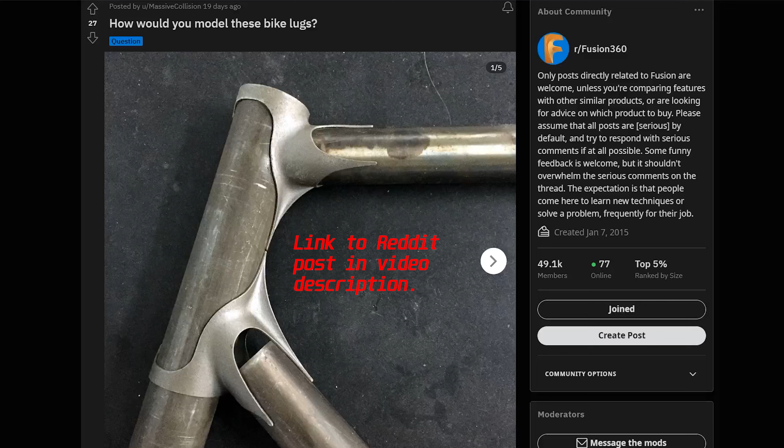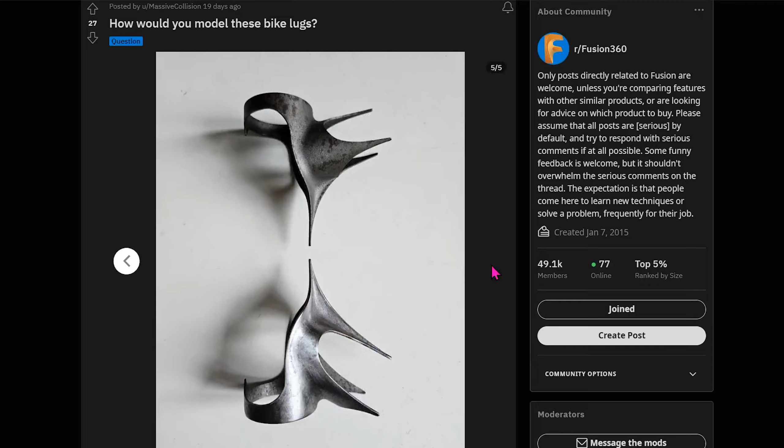We have a few pipes here, and the aim is to model out these lugs that allow you to join the pipes together. Before I begin, I want to be clear in stating that I am not familiar with how these lugs can actually be manufactured, so the workflow here might not be suitable for all situations. It would be better to think of this as more of a conceptual exercise in modeling out a certain shape. Depending on how you want to make the parts, you can adapt this workflow accordingly.

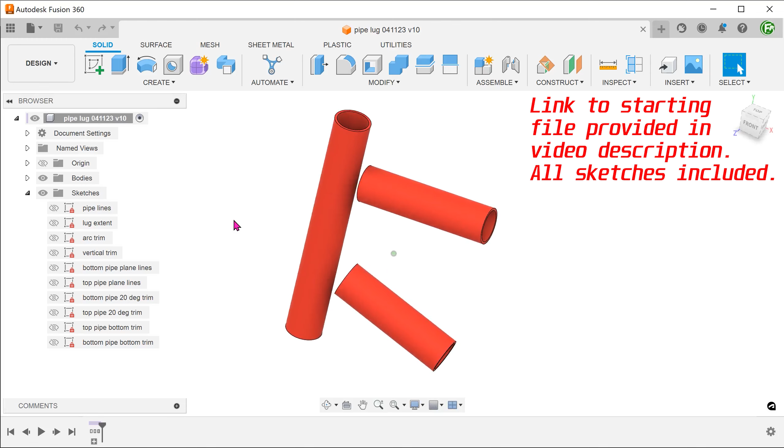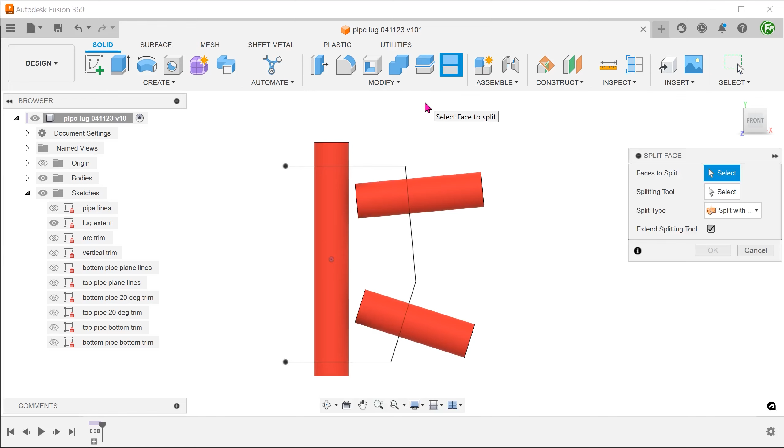We are going to start with these 3 pipes. These will provide a framework from which to build the lugs. First, we want to define the extent of the lugs. To do that, I have prepared a sketch here. Go to Modify, Split Face. Select the faces of the pipes. For Splitting tool, click on the Select box and select the sketch.

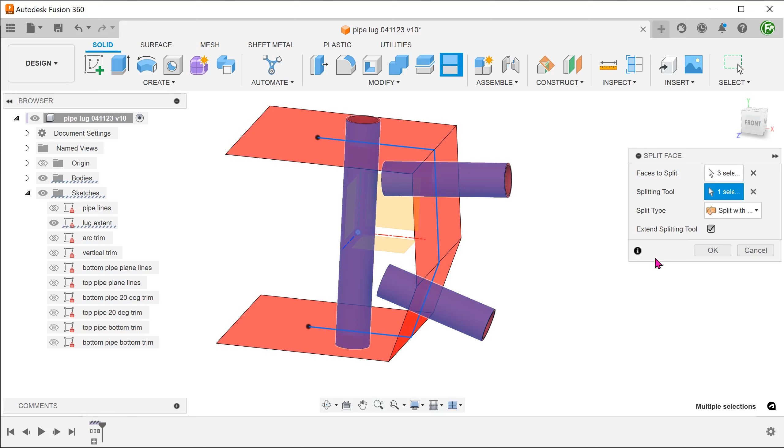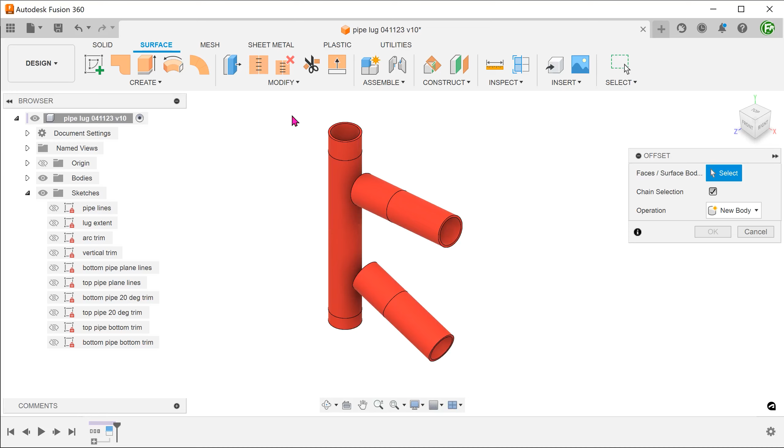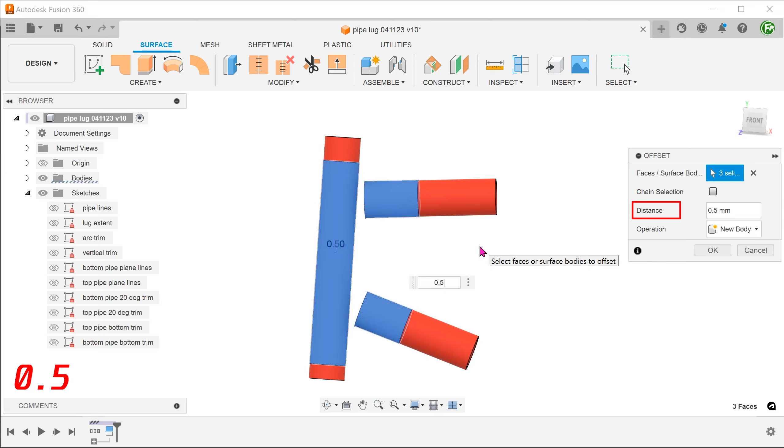From here, we want to create an offset of these faces. The offset faces will serve as the inside faces of the lugs. Activate the Surface tab. Go to Create, Offset. Remove the Chain Selection option so that we can select faces individually. Select these split faces. I want a clearance of 0.5 mm between the lugs and the pipes, so set that as the offset distance.

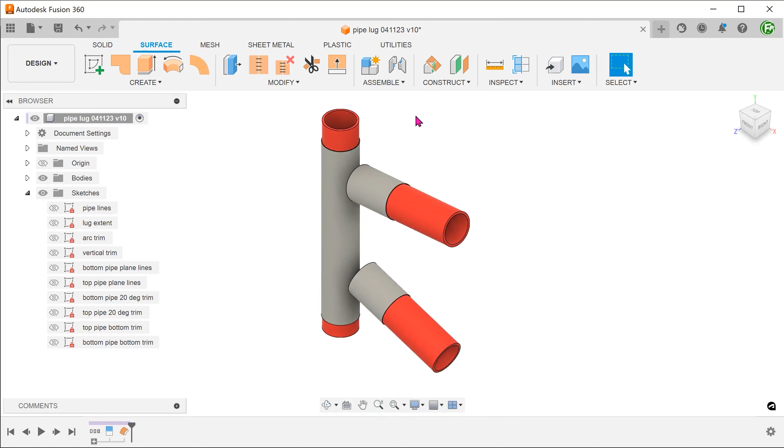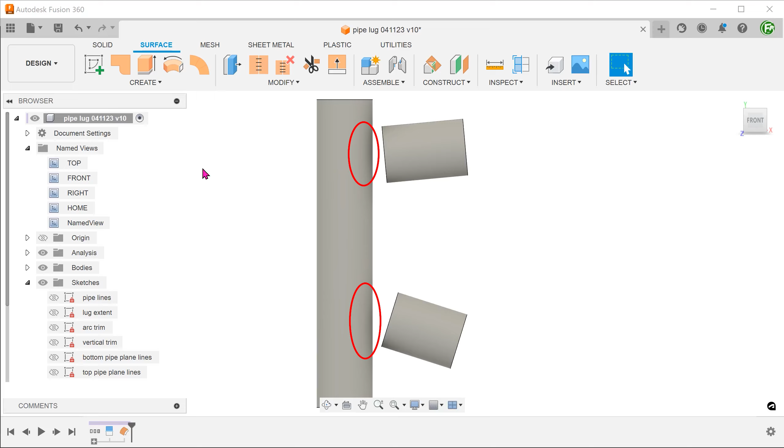Let's hide the pipes for now. We need to create a transition between these 2 pipes and the vertical pipe. This is going to require a loft. We need to create openings on the vertical, from which we can join the 2 with a loft. I have created a sketch which consists of 2 arcs joined together. These arcs have been joined together so that we can perform the trim in a single operation.

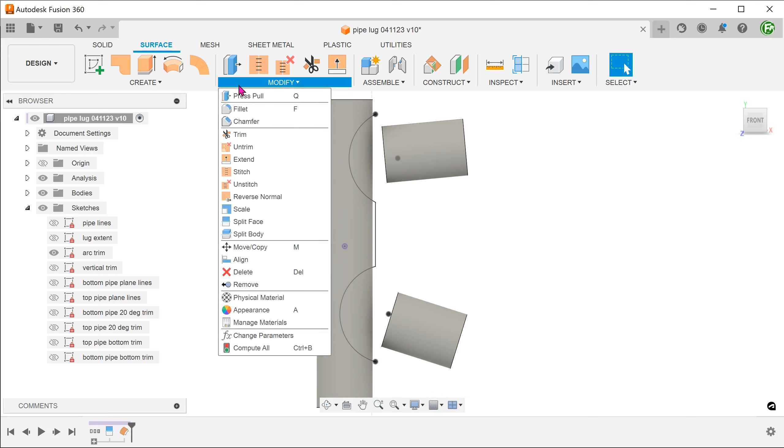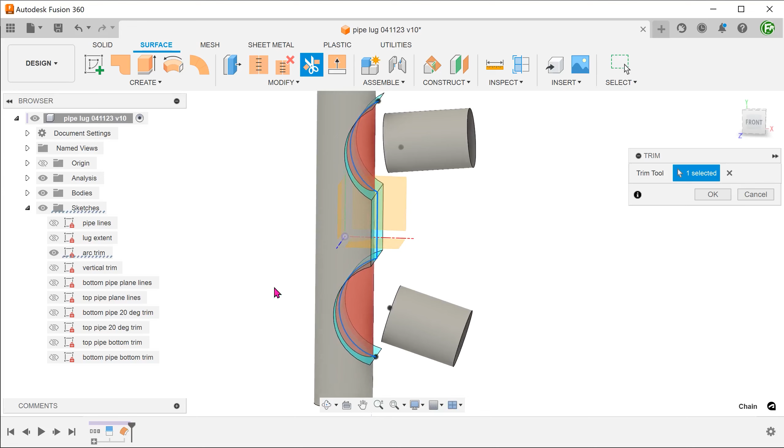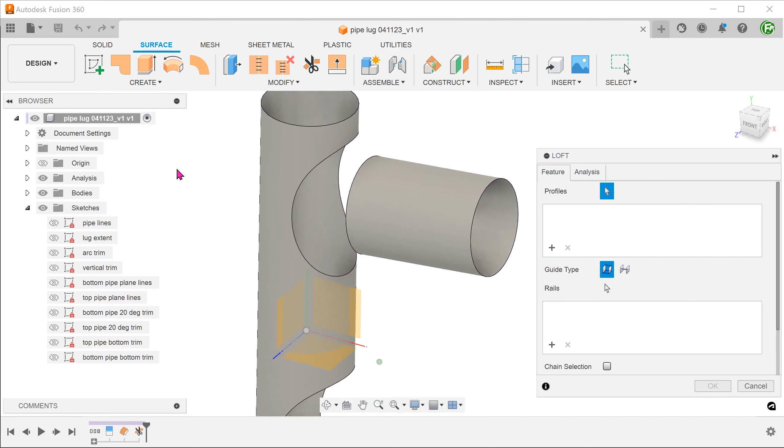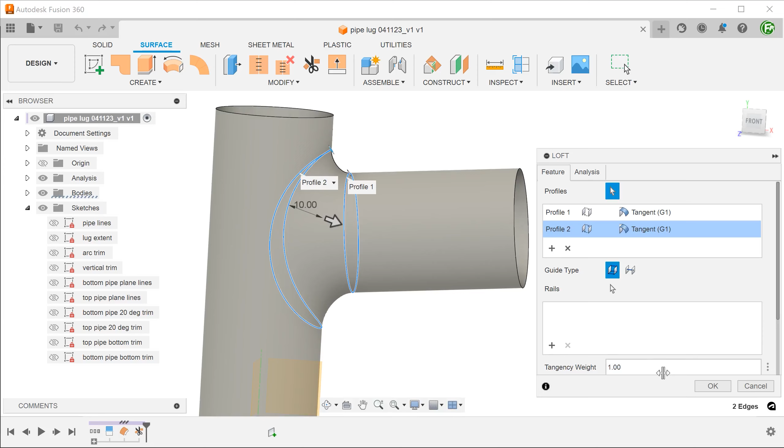Go to Modify, Trim. Select the sketch as the Trim tool. Select these faces to remove. Go to Create, Loft. Loft from this edge to this edge. Set both continuity options to tangent. Repeat these steps for the bottom pipe.

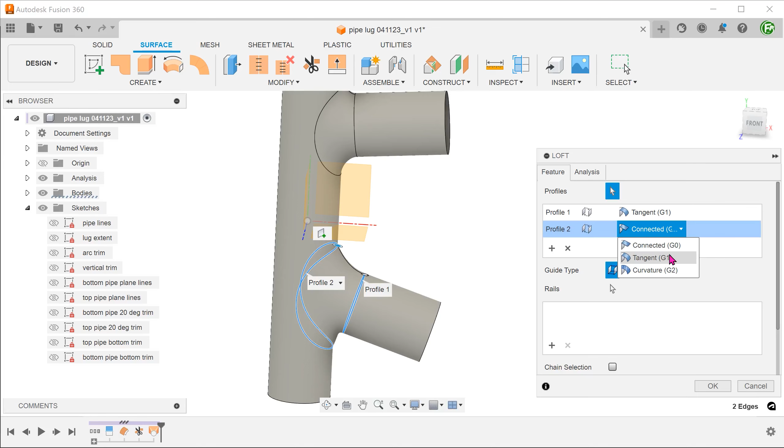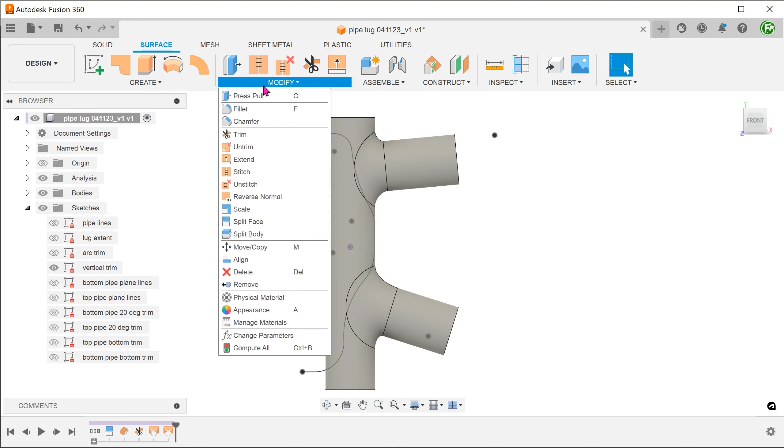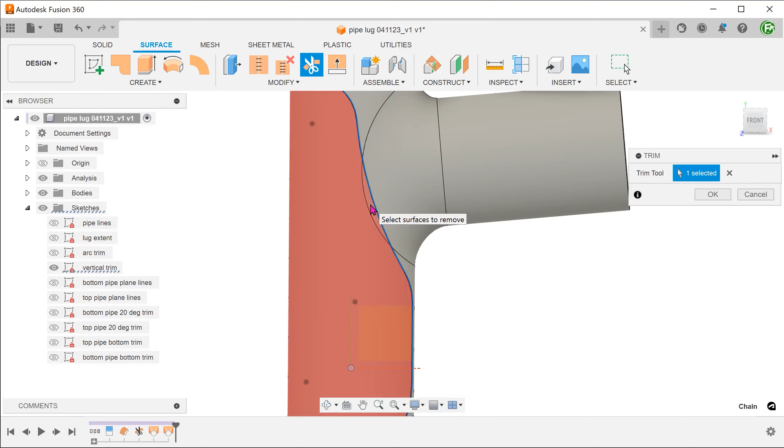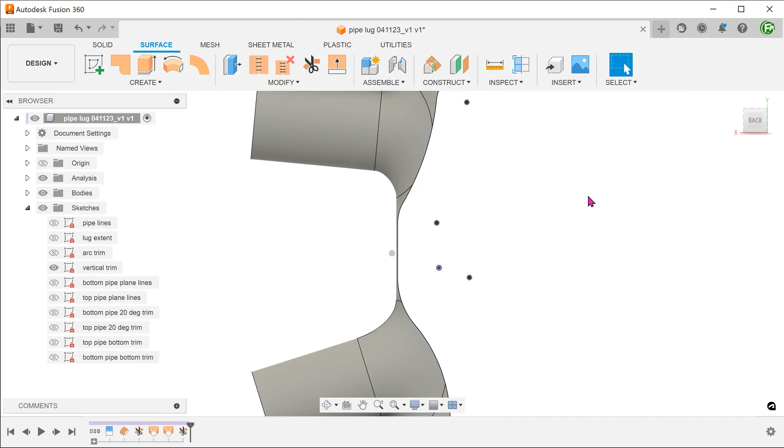I prepared a sketch here to trim the vertical pipe. Go to Modify, Trim. Select the sketch as the Trim tool. Select the faces to remove. Make sure that you select this small sliver as well. Do the same for the other side. You can create a sketch on the right plane to further trim this segment. I will leave that to you.

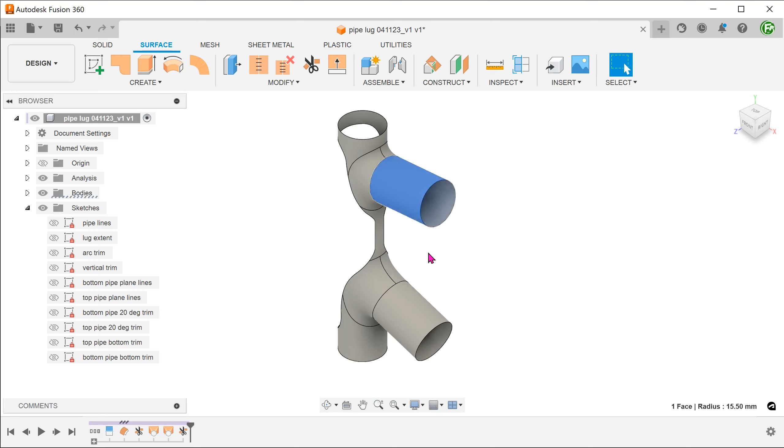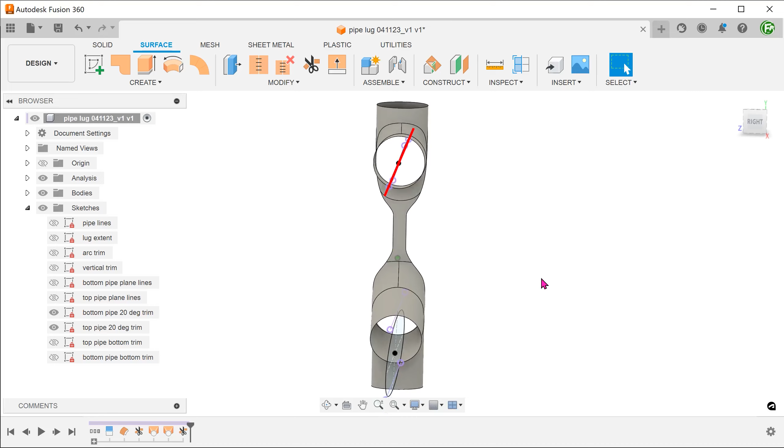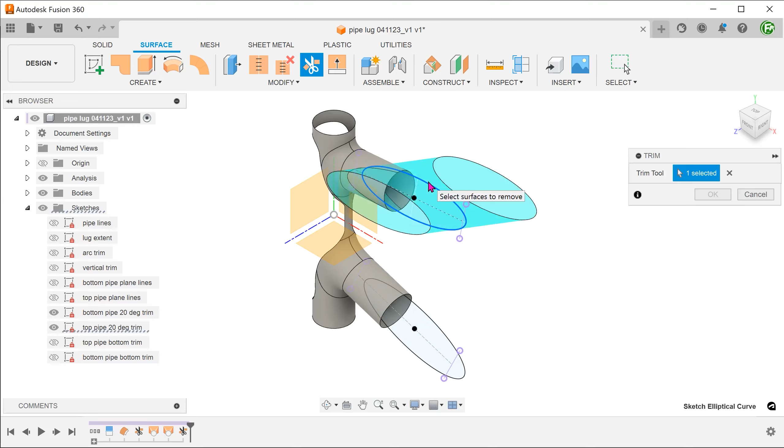For the next few steps, we are going to perform a series of trims on these two faces. Let's review these two sketches. These are ellipses rotated 20 degrees about the axis of the cylinders. Use these sketches to trim off the cylinders. Take note to trim only on one side.

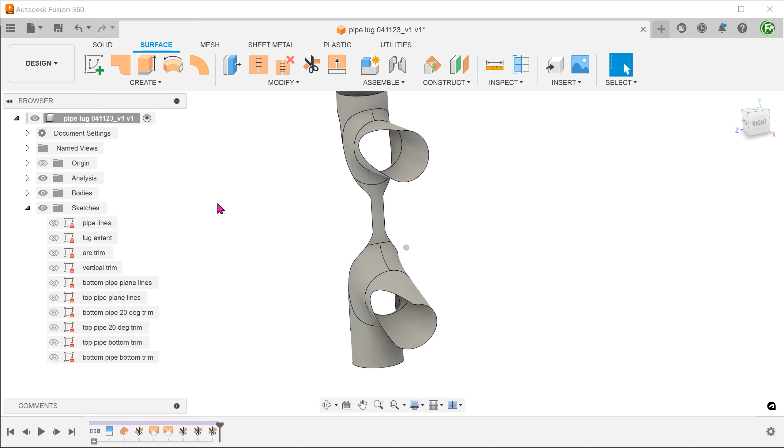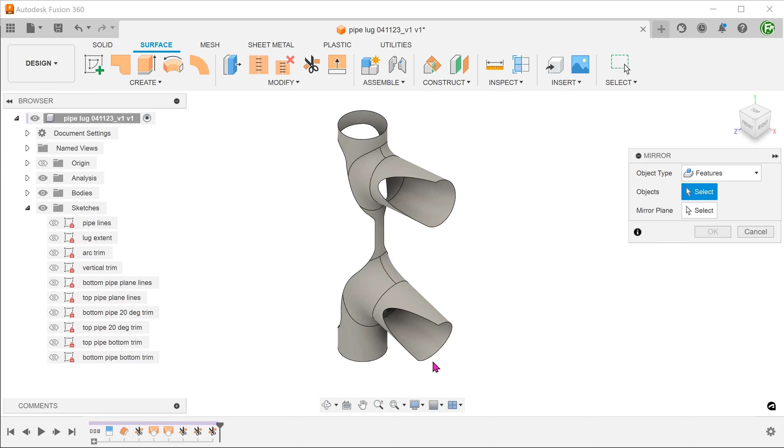Go to Create, Mirror. Set Object Type as Features, and select the previous two trims from the timeline. Set the front plane as the mirror plane. Set Compute Type to Adjust.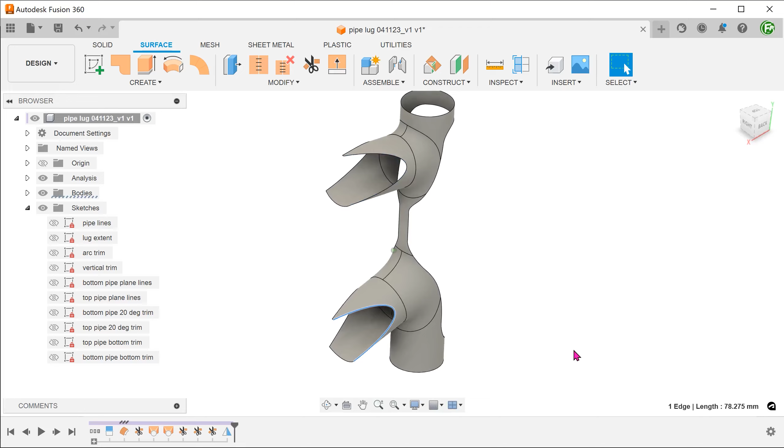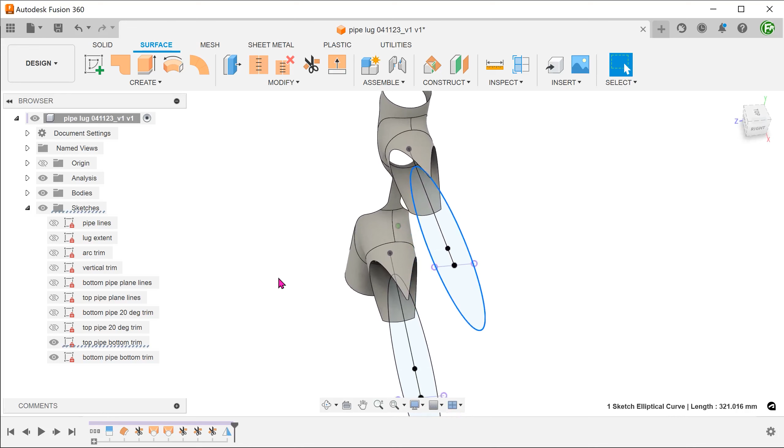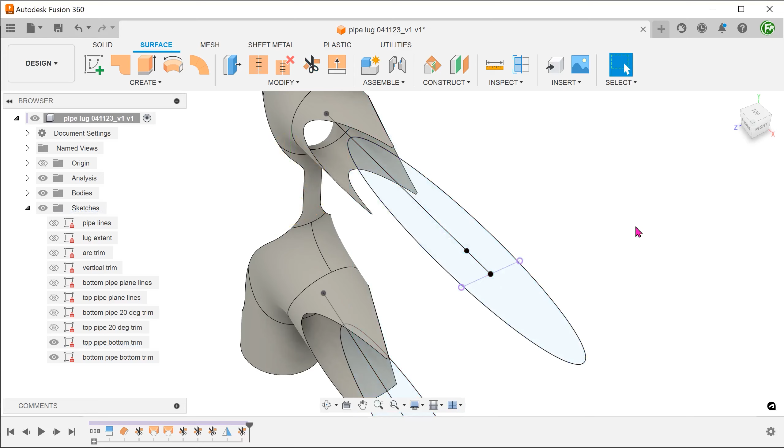Let's review these two sketches. We are going to use these sketches to trim off more material from the cylinders so that we can achieve the pointed tips. We have completed the overall shape.

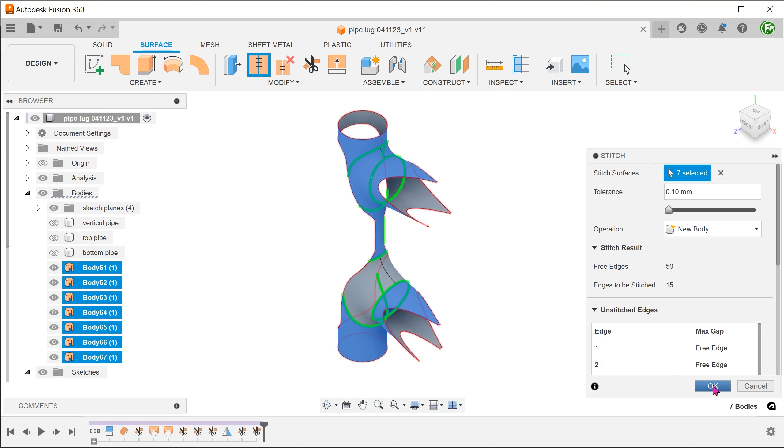These are still separate surface bodies. Go to Modify, Stitch. Box select all these surface bodies and stitch them into a single surface body. This is now a single surface body with zero thickness. Let's bring back the pipes.

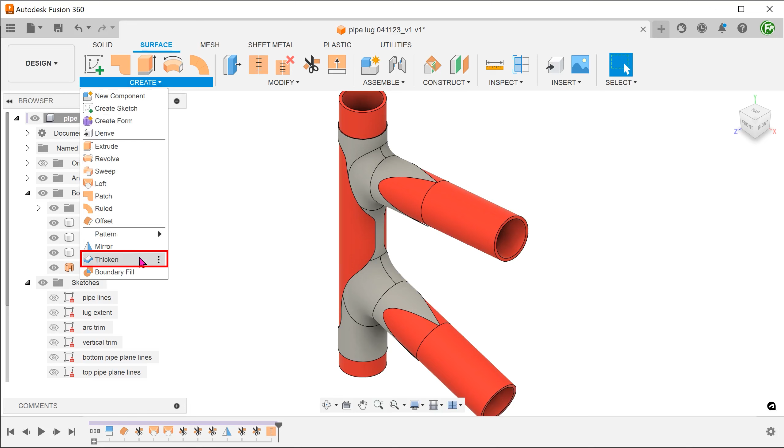Go to Create, Thicken. Select the surface body from the Bodies folder. In this case, we want to thicken away from the pipes, so set direction to one side. Set the thickness. If the direction is incorrect, you will need to put a negative in front of the thickness value.

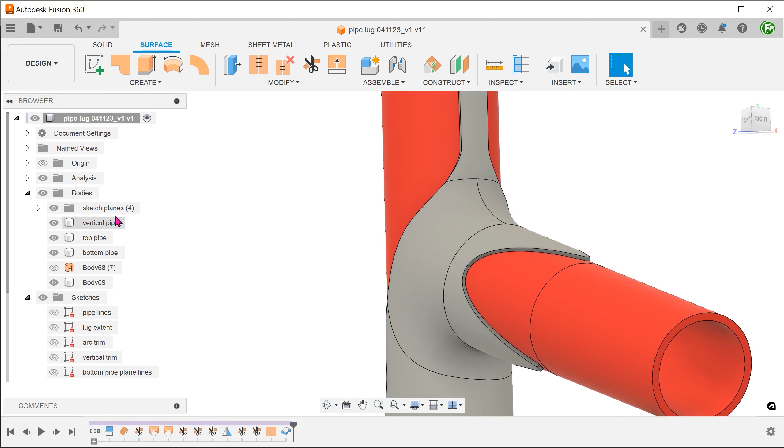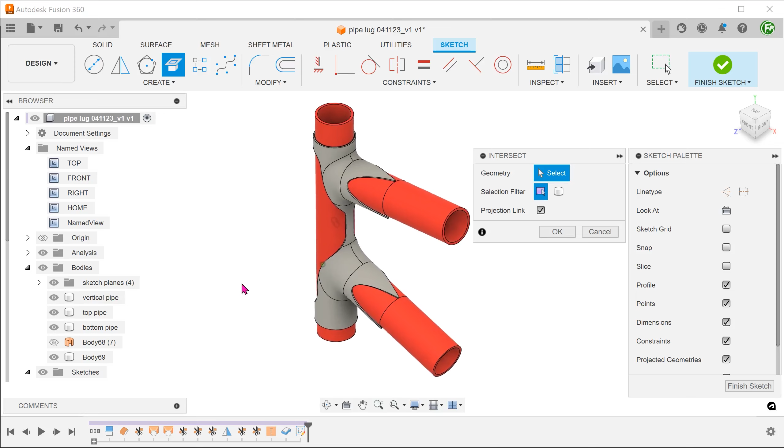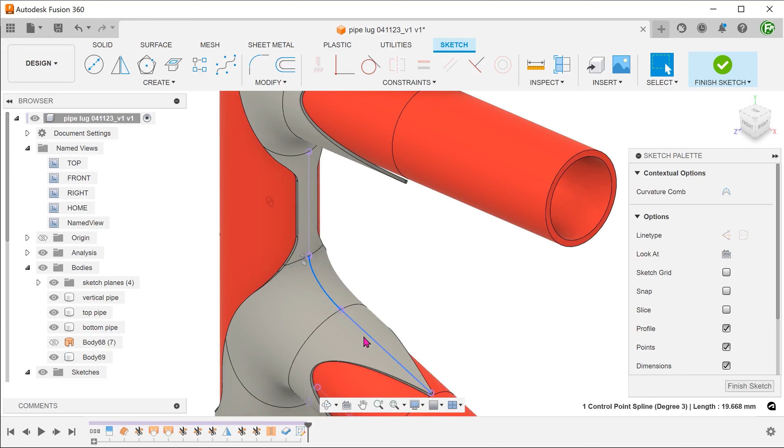Next, I'm going to add this rib as reinforcement. Begin a sketch on the front plane. Go to Create, Project Include, Intersect. Select these faces. These projected lines represent the intersection between the sketch plane and these faces. Click on Look At to return to a view normal to the sketch plane. Let's hide all the bodies.

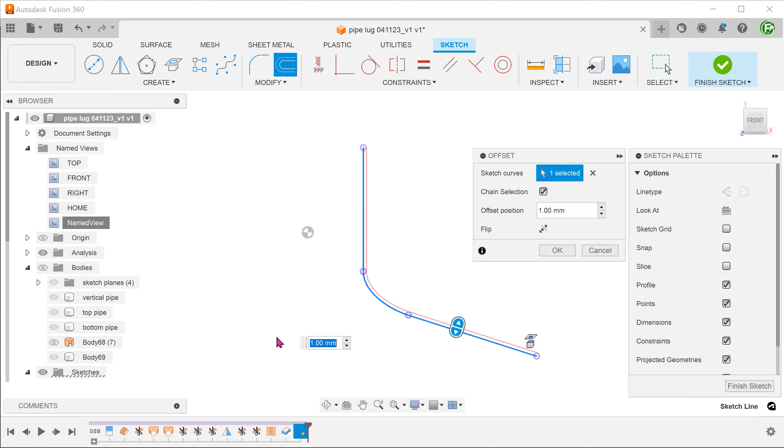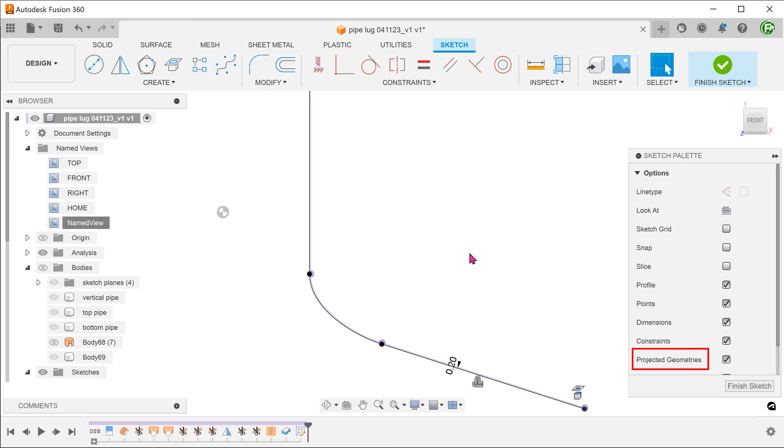The plan is to draw the profile for the rib and then use the rib tool. During testing, I find that if I draw the profile directly on these projected lines, the rib does not generate properly. So I am going to create an offset of these lines. Select these projected lines and set the offset distance. Make sure to offset into the material. We can hide the projected lines by checking off the Projected Geometries option in the Sketch palette.

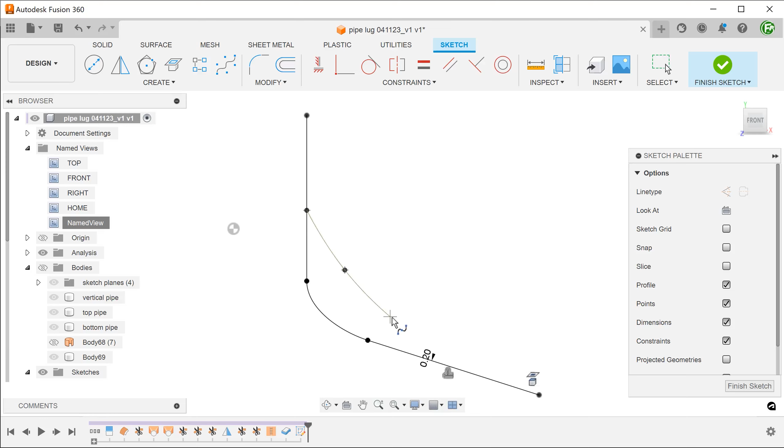Begin a fit point spline and start to draw the rib profile. Set tangent constraints between the spline and the offset lines.

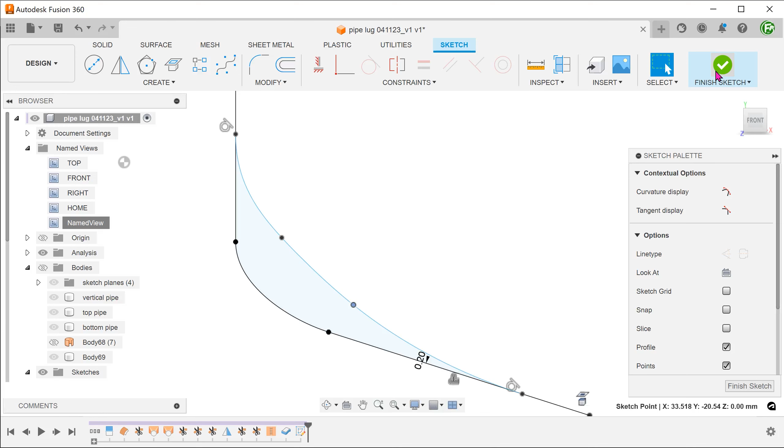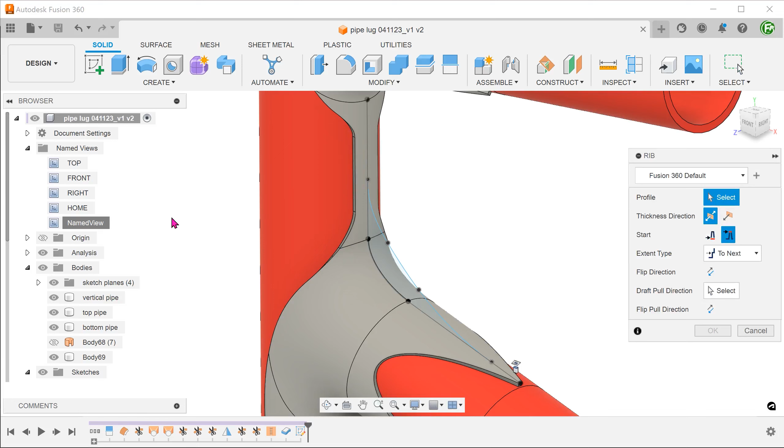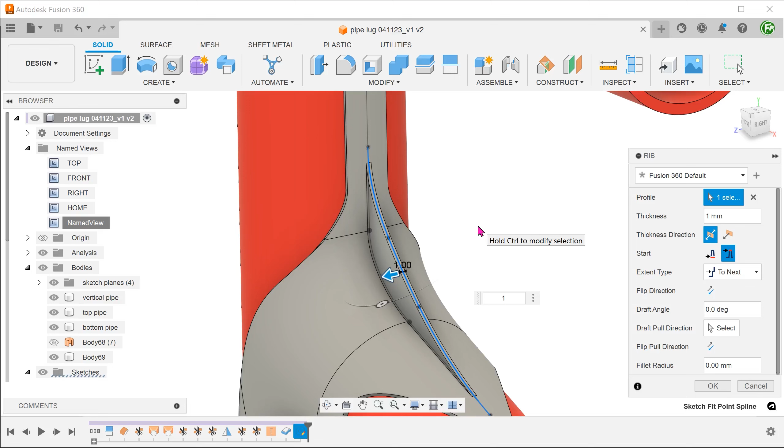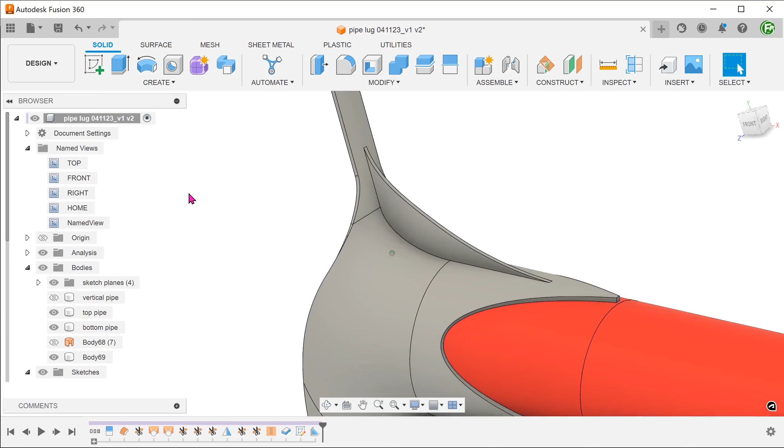Activate the Solid tab. Go to Create, Rib. Select the sketch line as a profile. Adjust the thickness. If it does not look right, try flipping the direction. The rib command would automatically create material to wrap around the faces that are spanned by the sketch arc, without creating excess material on the inside. From here, you can go ahead to create ribs in other areas. Lastly, you can split this into two separate pieces.